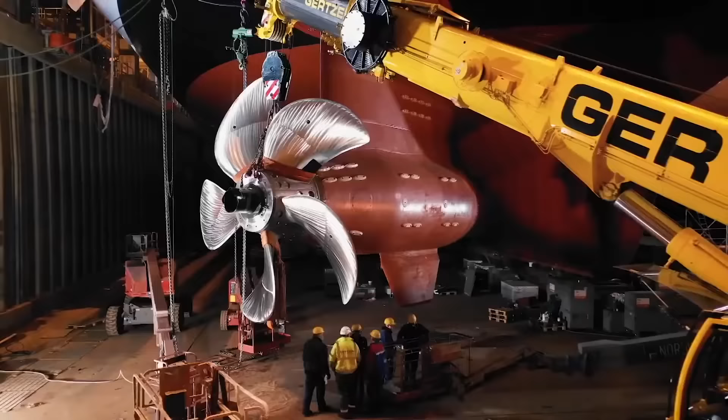By the way, the ship doesn't have 2 of these propellers, but 3. They're mounted on podded propulsion systems, so-called azipods. Those are made up of huge pods which are suspended from the bottom of the ship at the stern. They are capable of rotating 360 degrees, meaning azipods provide the giant vessel with easy and quick maneuverability.

I will show you in more detail how all this works in the second part of the episode, but for now, I will only say that these azipods were manufactured in Finland, and then sent by sea to the French town of Saint-Nazaire, the home of the shipyard where the vessel was built.

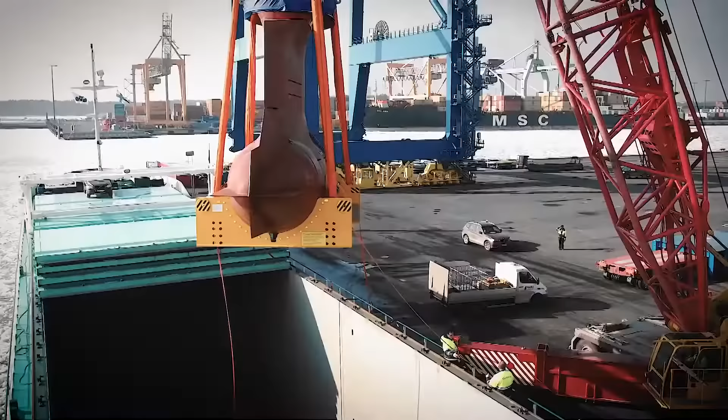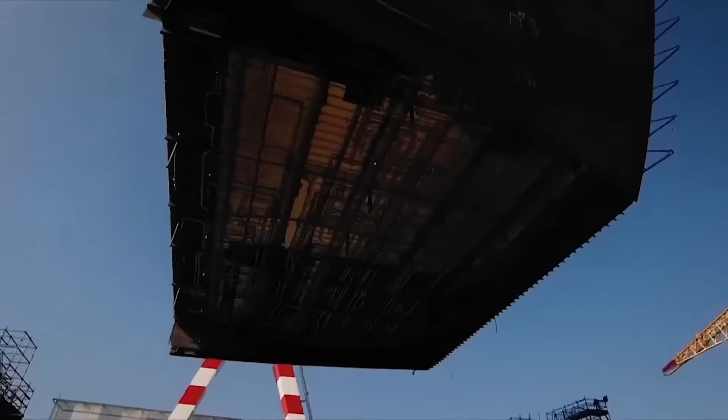In general, Symphony of the Seas is a huge construction set consisting of hundreds of thousands of parts which were manufactured in dozens of different countries located on different continents. So it began to unite people from distant corners of the world even before the first passengers of various nationalities ever stepped on board.

Boarding a ship is very much like boarding an airplane. Even these gangways, well, those who often fly know that they are almost identical to those in airports. Well, maybe these are a little wider. Only planes have a maximum of 2 such gangways, while the largest airliners might have 3. But here there are 5 of them.

And another interesting peculiarity: those who fly know that boarding of an aircraft starts about an hour before departure and stops 20 minutes beforehand. But since 6,000 people have to go through here onto the ship, boarding begins 6 hours before departure, so that everyone has time to make it on board. This is why cruise ships almost always depart in the evening. All day long, passengers come on board, get used to their cabins, and then closer to sunset, the gangway is finally pulled back, the doors are all closed, and the ship rolls away from the quay wall.

Thanks to those azipods that we mentioned earlier, and an additional tail rotor, Symphony of the Seas completes this difficult maneuver by itself without the help of any tugboats. Only a small Coast Guard patrol boat moves ahead of it, dispersing small pleasure boats and ferries out of the liner's path. This moment, already routine for the crew, is always quite exciting for the passengers, who at the moment of departure always pour out onto the upper decks. After all, the sea, and even more so these calm oceanic waters, aren't anything like railroad tracks, and these gigantic ships are actually seen off in a very different way from trains.

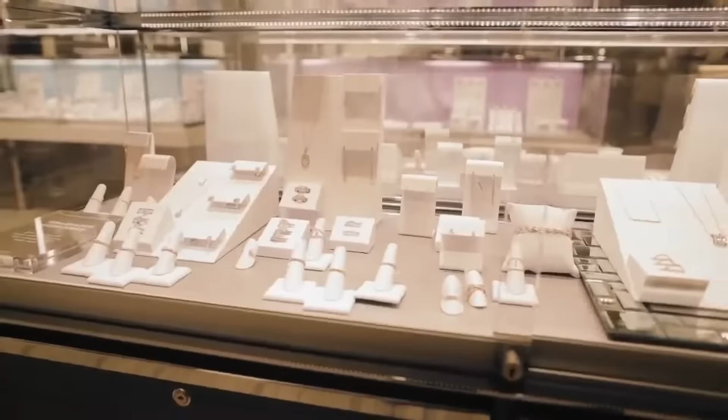However, the passengers will hardly have time to feel any separation woes on the ship. This giant floating city is designed to be fun and entertaining. The liner is 1,188 feet long, more than 3 soccer fields. Its width is 216 feet, and in this huge space there are 28 restaurants, 3 swimming pools, 10 jacuzzis, a theater equipped with the most complex Broadway machinery, an ice rink, a tropical park, a water park, a fitness center, a casino, and many shops and boutiques that constantly keep tourists in a state of shock and awe and continuous happiness. It is somewhat reminiscent of something out of a fairy tale, a place where you need only eat, sleep, and drink.

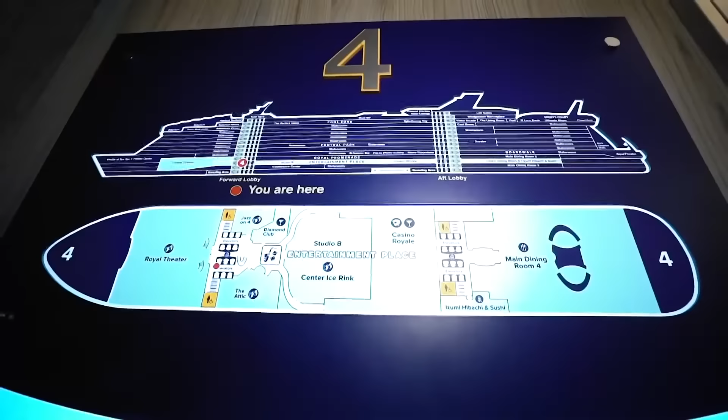When you look at the map of the ship, these are posted everywhere here, you get the feeling that the ship is some kind of toy. Yes, there's 12 passenger decks. Yes, it says 2,750 cabins, but what do all these numbers mean? You only start to get a sense of it right here in the elevator atrium. Just take a look. 6 high-speed elevators transport thousands of people to a height of 229 feet around the clock. And at the same time, all this is now moving at a speed of 30 miles per hour in the direction of Mexico. Incredible.

Even more incredible is the fact that the ship is directly controlled by only 3 people while it's in motion. And among them, there is no boatswain, no skipper, no helmsman. Even the captain himself isn't on the bridge all that often. Today, the people who control the ship from here, from the captain's cabin, are no longer what you might imagine, sailors with tough, salty, weathered faces. They look more like office workers, and this place resembles some kind of control room.

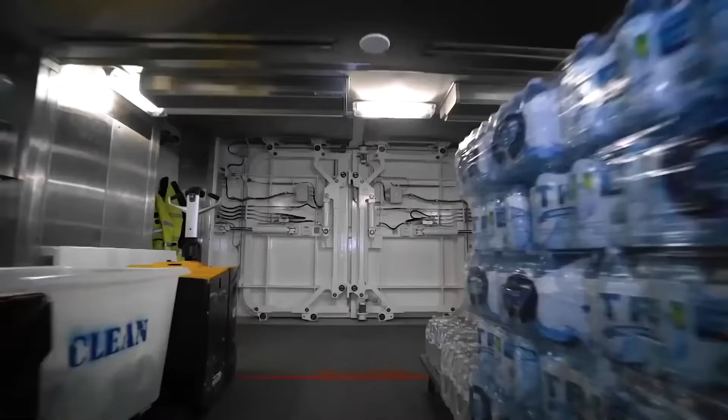They are very afraid of the possibility of food poisoning here. Since thousands of people live compactly on the ship, a simple case of E. coli can turn into a real epidemic in the span of just a few hours. And even putting that aside, not all countries can provide products of the high quality that Symphony chefs require.

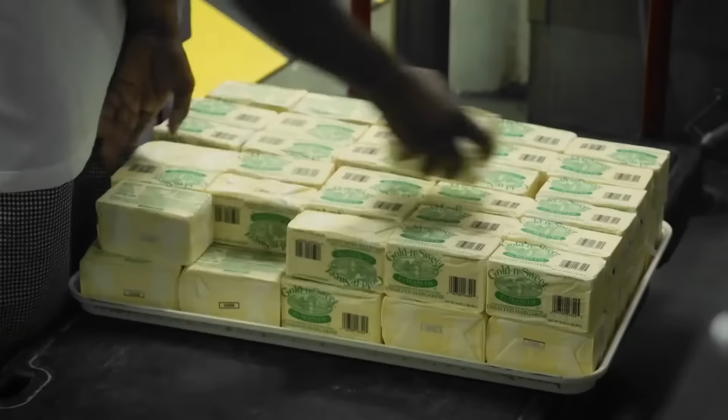Milk, meat, seafood, vegetables, frozen products, fish, all of that and more is stored in the dozens of other refrigerators. Anything and everything that might be needed to prepare the 350 different dishes that can be found on the ship's restaurant menus. Of all the foodstuffs stored on the ship, only 2 products are honored with having their own private refrigerators. Well, simply because they are the most consumed items. First, we've got bananas. Here are plenty of boxes with yellow ones, and there are also boxes with green ones. They will finish ripening during the cruise.

And the second product is the most popular. What do you think it is? I'll show you now. Eggs. 120,000 eggs are eaten on board every week. Moreover, bananas and eggs are, as economists and logisticians say, goods of inelastic demand. Their consumption rate, and hence the required amount, is easy to predict. Things are more interesting when it comes to the rest of the products on board.

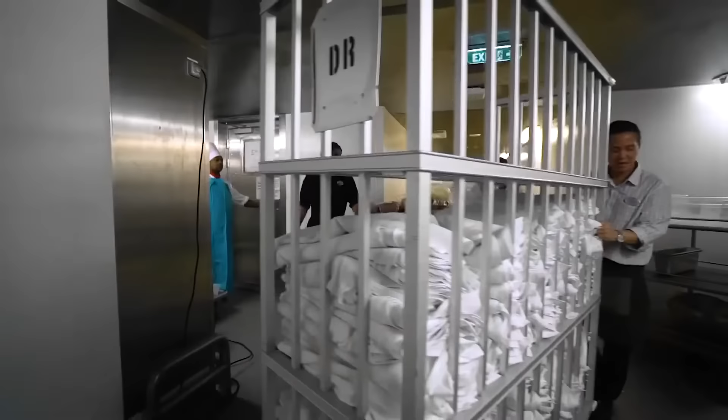A specially developed computer program analyzes the number of passengers and their nationalities even before setting sail, and depending on that information, it gives recommendations on how many of this or that product you need to take with you on any given voyage. For example, if there is a large number of Latin Americans on board, more meat and spicy foods will be added to the menu. If there are more Asians, they'll reduce the amount of dairy products, and if Indians are prevalent, they will increase the number of curry dishes, but at the same time they will bring less beef.

One of the main delicacies of any haute cuisine is of course the Atlantic lobster. Here he is, such a handsome guy. This dish, by the way, is not cheap. Therefore, it is very rare. And even here it's cooked, well, not all that often. It's a one-of-a-kind item, one might say. Made 6,000 times every day.

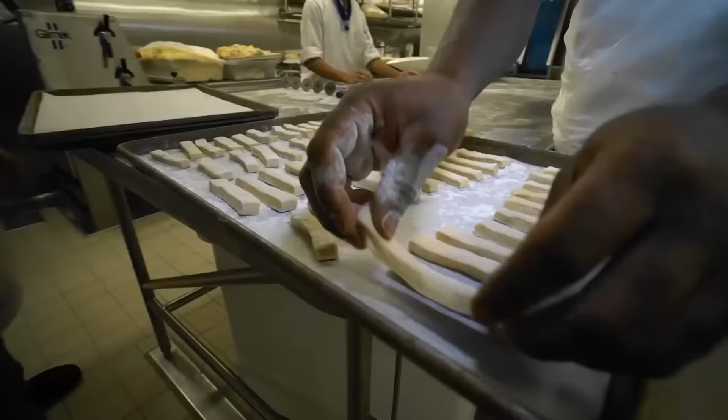Each of these workers, there are mostly Filipinos working here, shells about 500 lobsters a day. Those of you who have ever shelled, for example, crayfish, can imagine how much work this entails. On just 3 decks, more than 1,000 people are employed in this huge floating kitchen, 250 of whom are professional restaurant chefs. They fry, boil, flambe, sauté, and whip around the clock and in shifts.

Take breakfast rolls, for example. 12,000 of them are baked here every day. In fact, the responsibility of the cooks here is enormous. The clients on the ship are very demanding, the products are expensive, and the cooking portions are gargantuan. Therefore, the slightest mistake in the proportions of ingredients can cost tens of thousands of dollars.

Well, for example, tomato soup, 160 liters of it. If it's a little bit overcooked or undersalted, that's it. Eat it yourself since no one else will. Seating and serving several thousand people in the liner's restaurants at the same time is a separate logistical task, and they strive to make it so that customers don't have to wait more than 15 minutes for an order.

Several hundred waiters of 50 nationalities cope with this task, each of whom must speak at least 3 languages. And bartenders should know at least 5. Well, technically there was an exception made to that rule. In general, everything on this ship suggests that this is a high-tech structure created according to the latest leaps of science. For example, in this bar, drinks are mixed, well, probably in the most progressive way on the planet.

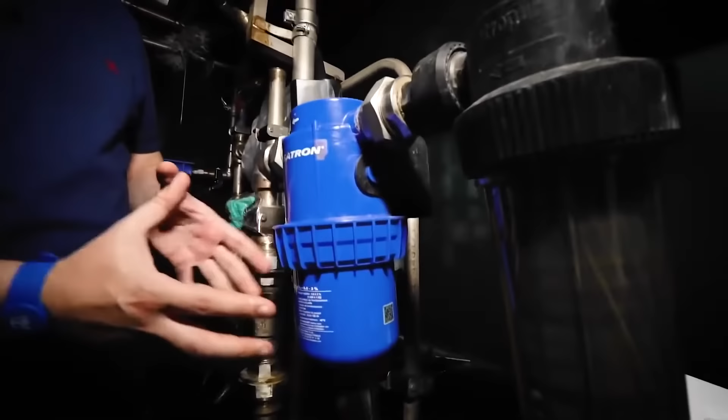Here's the main secret. Here in this blue barrel, fertilizer is kept. Water passes through it, carries away some of the fertilizer, and carries it to the plants. So thanks, in fact, to this seemingly unremarkable little device, this whole huge blooming park exists.

Another secret of the permanently green park is its honeycomb structure. There is no solid ground here. All the plants, from the trees to the grass, are inserted into special cells in separate segments, small plastic boxes. It turns out to be something like a huge puzzle. If one of the segments suddenly starts to get sick or dry out, it's simply changed out for a new one upon arrival at the home port.

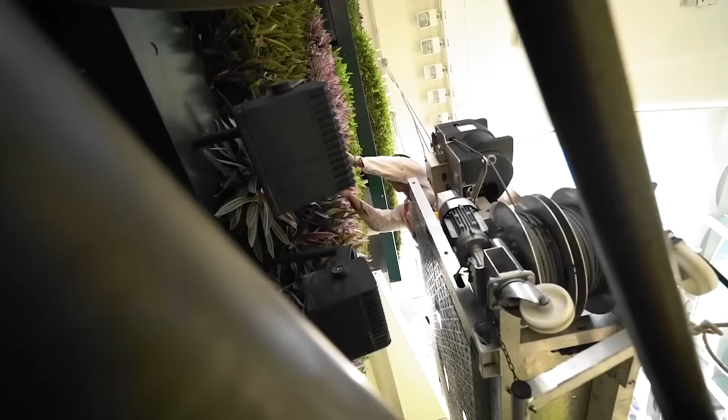This wall of vertical landscaping in the ship's central park follows the same principle. The gardener, who turns out to be a bit of an industrial climber as well, simply climbs in the bucket and changes out the parts of the wall that he doesn't like and discards the old segments. There is no time for sentimentality. Nothing should prevent people from enjoying their time here and being filled with joy. Remember what I said at the beginning, that this episode was about a cruise ship without romance and without leaving anything out?

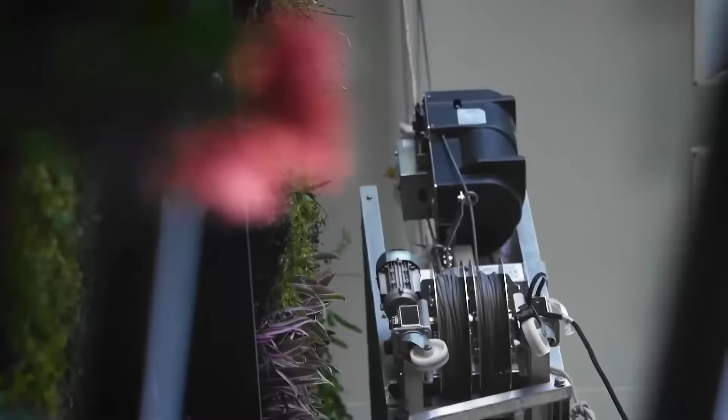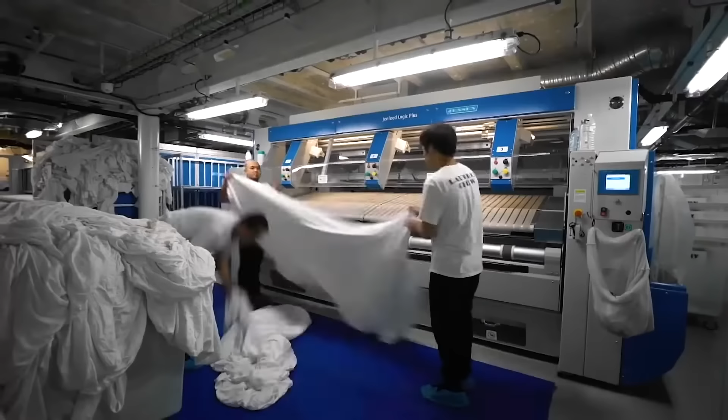In the next episode of Monster Machines, why doesn't the ice on the only floating ice rink in the Caribbean melt? Well, you know, it tastes like the most simple, ordinary Russian snow. How can 1,500 sheets be washed and ironed in one day? I want one of these for my house. Only thing is, I'm afraid it won't fit in my laundry room.

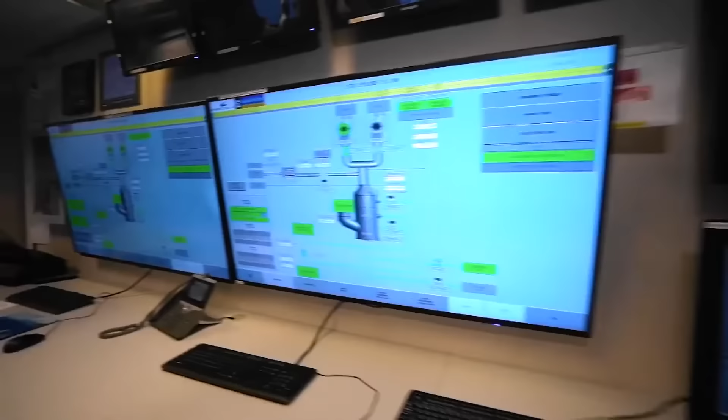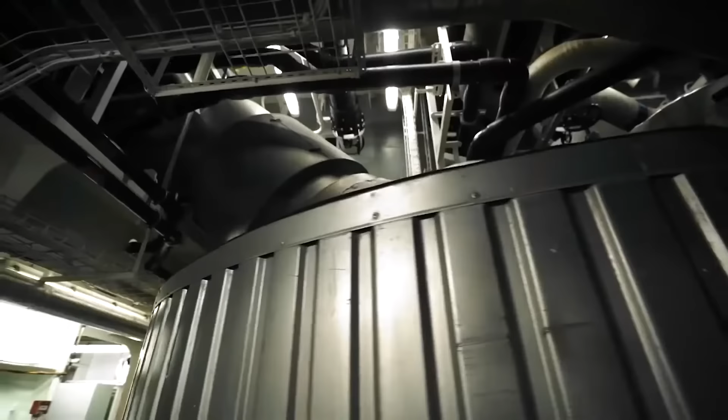Does Symphony of the Seas have enough lifeboats in the event of a disaster? How are the engines of this liner, which consume 3 tons of fuel per hour, arranged, and how do they work? 5th grade physics at work on the largest ship in the world. What is a 19th century telephone doing on a super modern ship? Hello? Bridge? And how can 30,000 plates get washed in 2 hours? Mr. Clean would be impressed. See all this and much more from the anatomy of the world's largest cruise ship in the next episode.

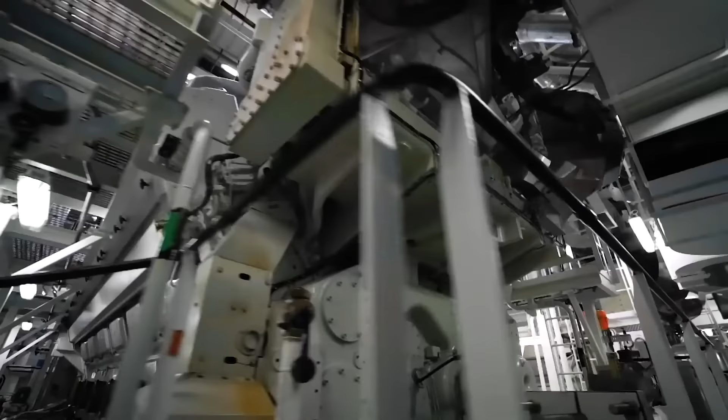In the first part of our look at the anatomy of the largest passenger liner in the world, we told you about and showed you why Miami is the home of this monster. Essentially, it turns out that the ship wasn't built to fit the size of the port, but the port was built to fit the size of the ship. Who are the people who run this giant, and why is there no helmsman on the ship? This is the captain's chair. There's no steering wheel. What room on the ship is the most secure and guarded? Here it is, the holiest of holy of Symphony of the Seas storage areas.

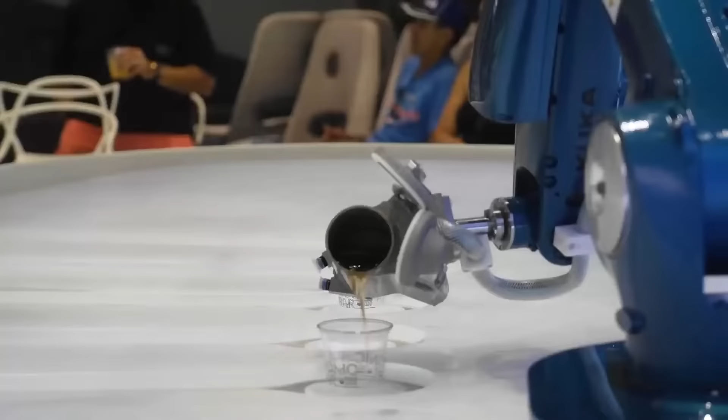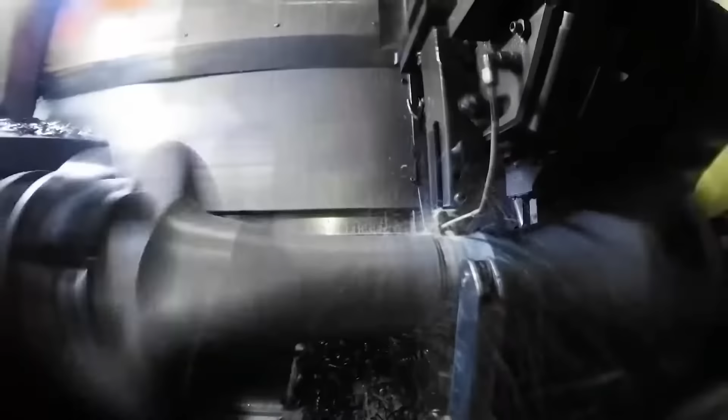And how many cocktail recipes does the least talkative bartender on the largest ship in the world know? You're not much of a conversationalist. All this was in the previous episode, and now we have even more about what's hidden inside this monster, a cruise ship without romance, but with science.

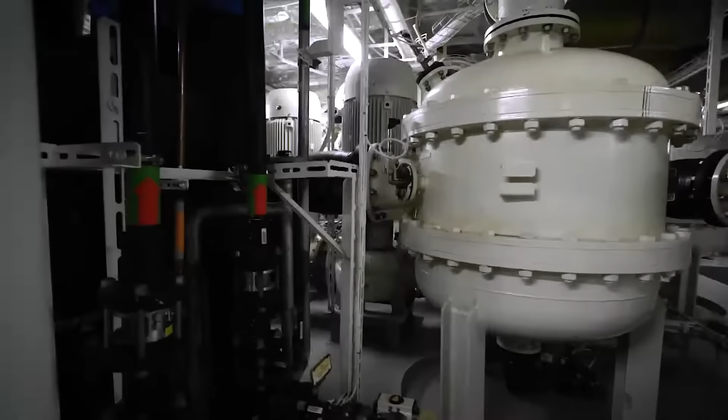And what could be less romantic on a ship than the machinery room? In the lower part of the ship, where tourists aren't allowed, day and night there's the roar of machines working in the semi-darkness, and these are what makes this entire giant city on water move. Symphony of the Seas is 6 diesel engines, a total power capacity of more than 100,000 horsepower. For a point of reference, that's approximately the power capacity of 1,200 cars.

However, not even close to all of this energy is spent directly on moving the vessel. The ship consumes colossal amounts of electricity. For example, for lighting, there are about 140,000 light bulbs on the liner. Also, electricity is spent on the operation of air conditioning systems and on the production of large quantities of water vapor. Yes, despite the fact that steamers and steam engines are a thing of the past, modern liners still use steam. A lot of steam.

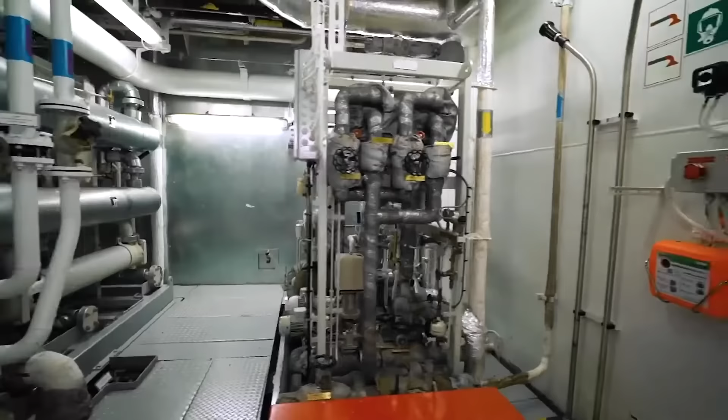No, it of course no longer rotates the turbines as it did, for example, on the Titanic, but steam is needed for more domestic purposes. It's a simple method for heating the water in showers and bathrooms, and it also heats different spaces when necessary. However, those aren't its main function. Steam is necessary for the heating systems for the huge fuel and oil tanks, and it's also used in fuel-oil separators. It's consumed by the turbo drives of some pumps, and, well, it's still necessary for several other important machines on ships, even in the 21st century.

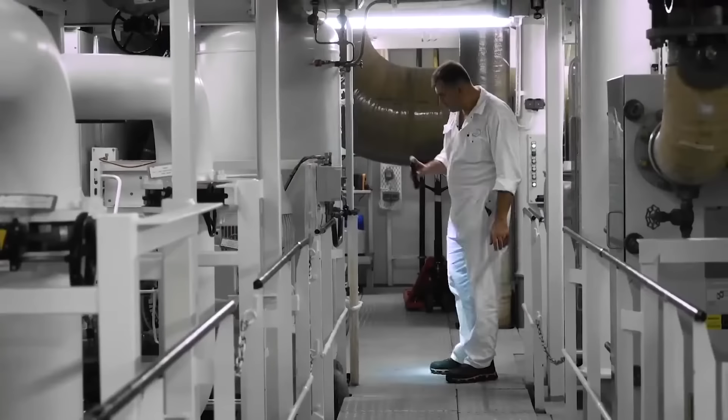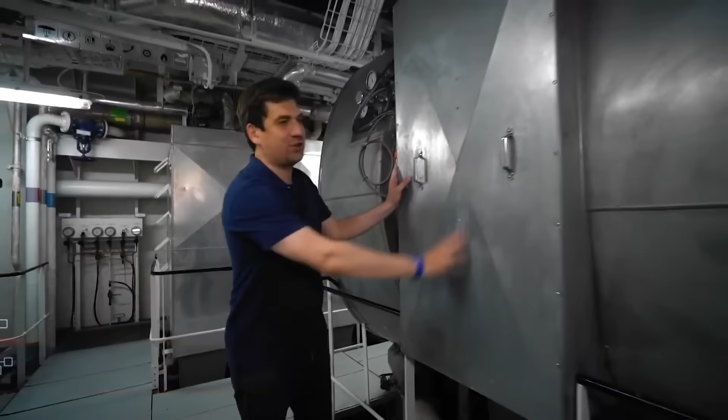Moreover, it must be perfectly clean so that impurities don't build up on the walls of the steam lines. Therefore, it is created from distilled water. But where do they get such large amounts of distilled water? It's produced right here on the ship using giant distillers. Here they are. There are 3 of them. The principle of operation is very simple. Well, it's basically a big tea kettle.

This is where water from outside comes in. Here it's boiled, steam accumulates in the upper part of this chamber, and the sea salt settles down at the bottom. So after a while, overheated steam, there's a lot of it, enters this chamber. Here it condenses, and as a result, the finished distilled water is drained through the pipe. And the leftover salt? No, it's not used in the kitchen. They just throw it back into the sea. Several tons every day.

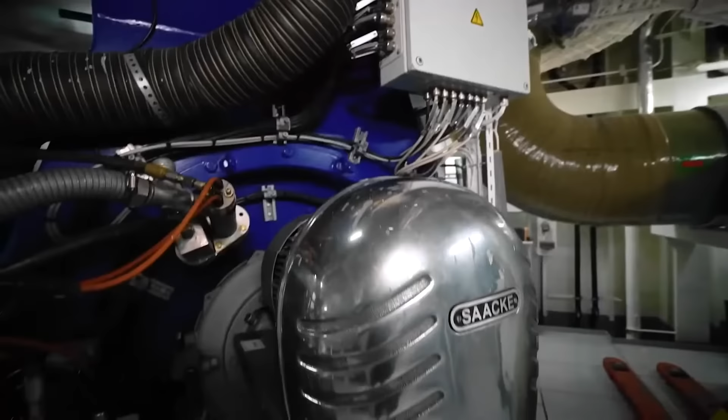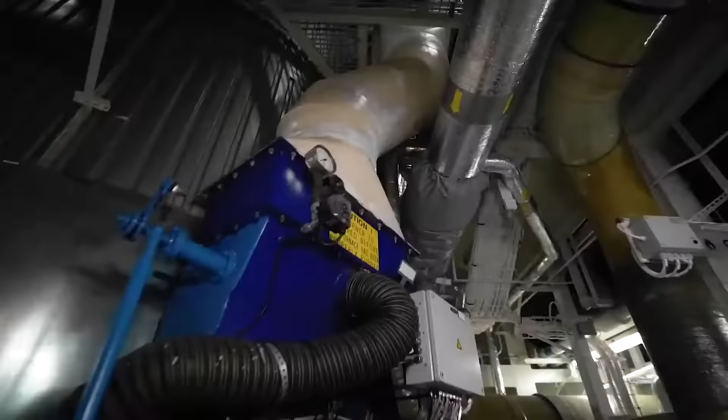In the end, the resulting steam is used for its intended purposes. Moreover, part of it, when it condenses again, is sent back to the boiler. This is the so-called reverse cycle, but most of it is irretrievably lost, and therefore the reserves of distilled water have to be replenished all the time. It's also needed to freeze an actual skating rink on the ship. Here you can skate during the day and watch an amazing ice show in the evening. That includes a number of Russian figure skaters.

And by the way, the ice here is of a very high, one might say, Olympic quality. The ice on the rink measures in at about 3.5 inches thick. Well, surely many of you have seen an ice resurfacing machine on TV, or maybe even in person. They've got the exact same kind here, though maybe it's a little smaller than typical ones.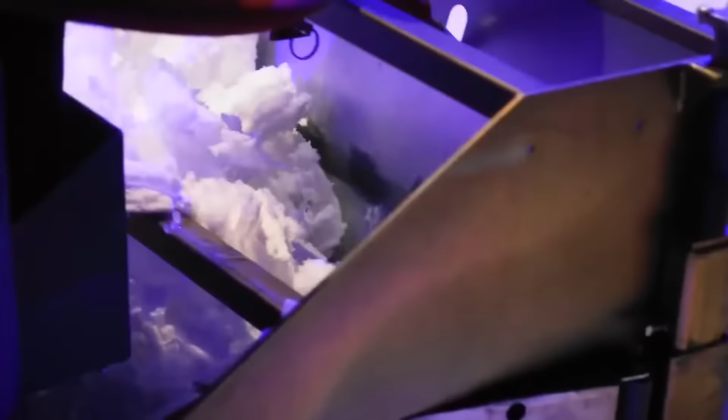By the way, since this ice is frozen from desalinated seawater, it doesn't freeze quite as well. And according to the skaters, this ice is softer than that on which they are used to performing on land. To be honest, it's hard for me to imagine how ice could be soft, but what is absolutely certain is it's incredibly clean, distilled. I even gave it a taste, but it was really nothing miraculous, just your typical snow.

The total weight of the ice in the arena is several tons, and a refrigeration unit is needed to freeze it. Again, it's about the same as the one used on professional skating rinks and professional arenas. Well, this one might be a little smaller. It's located, as you would expect, in the area under the stands.

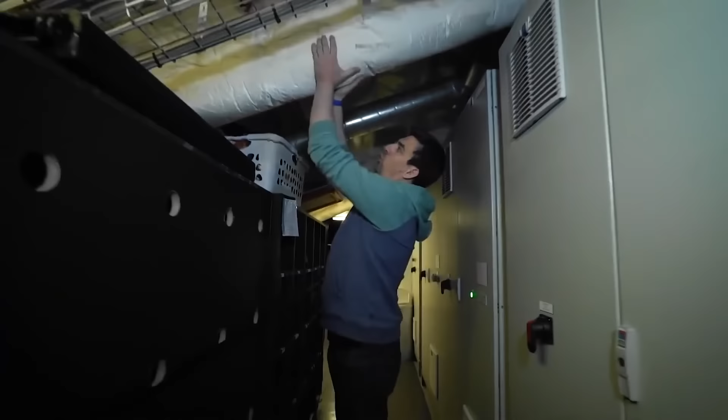The principle of its operation is very simple. Through special pipes, here they are, wrapped in thermal insulation, water and refrigerant with a temperature of 14 degrees Fahrenheit are pumped to the arena. This freezes the ice layer by layer. It takes about 5 days to prepare the entire ice rink.

The owners and designers of Symphony of the Seas claim that this ship is not only the largest in the world, but also the safest. There are so many different safeguards in place in its control system that it is argued it's almost impossible to lead the liner into disaster, even if you were to deliberately try to do so.

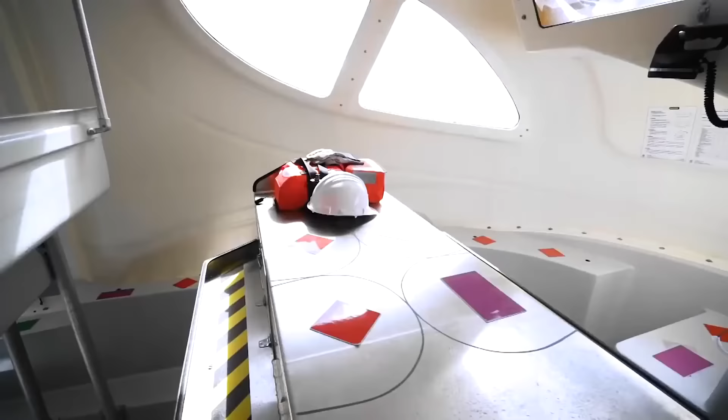Still, in the event of an extreme case, there are means of evacuating the ship on board. They have to accommodate the evacuation of all passengers and crew if something were to happen. These lifeboats, to match the ship, are the largest in the world. Each has a capacity of 370 people. There are 18 of them on the ship.

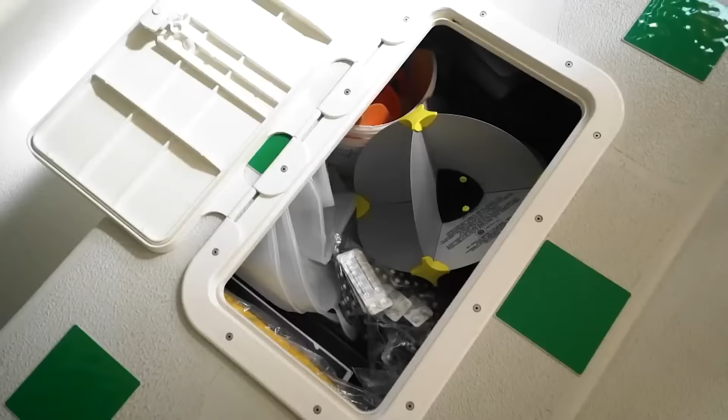Moreover, they are kept fully prepared at all times. Their fuel tanks are filled, they have a cruising range of about 155 miles. There is a special supply of dry rations and water on board in special sealed boxes. In the event of a disaster, there would be no time to bring it all from the ship. In general, everything is thought out to the smallest detail. This unsinkable and waterproof plastic jar, for example, contains signal flares.

In addition to the huge boats, there are also many rafts that inflate themselves in the water and several of these high-speed rescue boats. They are used to coordinate action and quickly help people who find themselves in the water. The crew must participate in evacuation exercises at least once a month. This vessel has never seen a real red alert, but thanks to constant training, 2,000 crew members are ready for any turn of events, 24 hours a day, 7 days a week.

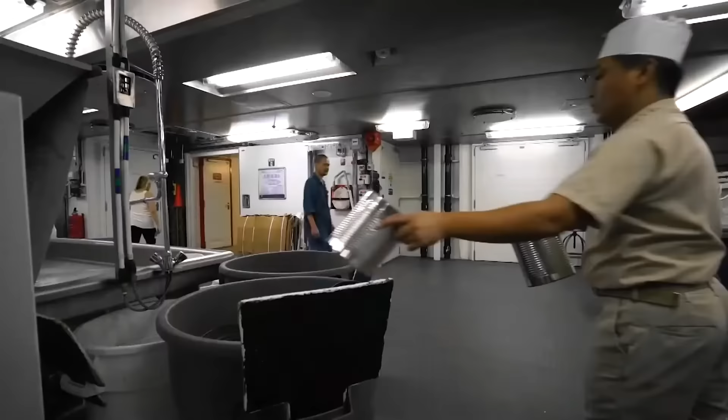The ship also has its own waste recycling plant. Here it is. This, for example, is a machine for pressing cardboard packaging. Here, cans are collected. Then they are all crushed into these large bricks. Cellophane is processed here. At first glance, it is a little paradoxical how they deal with glass bottles.

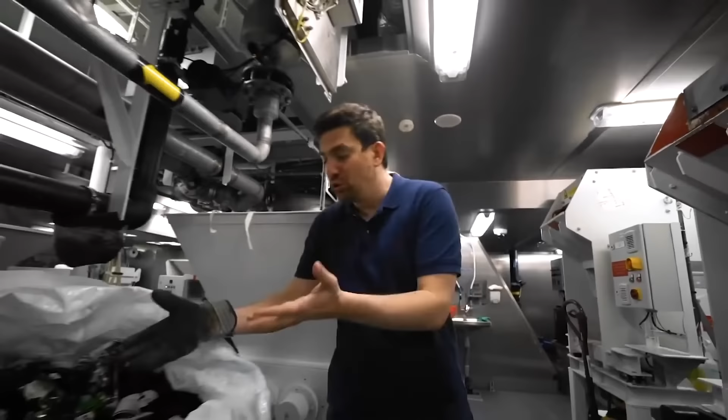I'll show you now. They are simply broken into little pieces so that they take up less space, and they are sorted as follows. Here we have a big bag with dark glass. Here we have broken transparent bottles, and here we have green glass. And here's what's surprising. As everywhere else on the ship, in this waste recycling shop, everything is kept perfectly organized. There isn't even an unpleasant smell here.

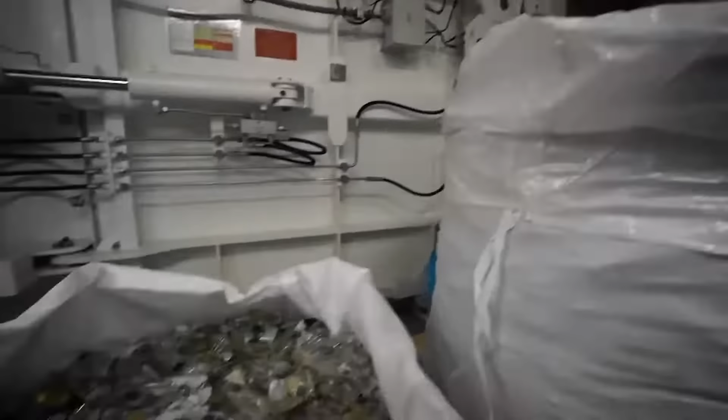The creators of this ship seem to have a thing about cleanliness and environmental friendliness. In a good way, of course. For example, the liner's engines burn several tons of diesel fuel every hour. But at the same time, not black, not even blue, but exclusively white smoke comes out from the Symphony's exhaust pipes, all thanks to scrubber cleaning.

Well, to simplify it as much as possible, the exhaust gases are washed with seawater. This dirty water is then maintained and stored in special tanks until the ship arrives at a port, and only carbon dioxide with a minimum amount of soot and impurities is released into the atmosphere.

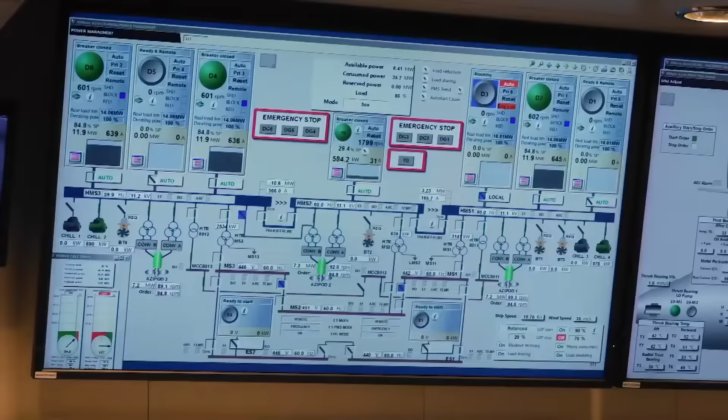Scrubbers and engines are managed from this control room. It's located in the very center of the ship, almost at the waterline itself. Therefore, there are no huge windows to be found here, like on the captain's bridge, but there are 51 monitors which display thousands of different parameters. The largest touchscreen control panel even had to be hidden in the ceiling. Here it's already pretty cramped without it.

There's a special emergency phone in this control room. Well, there's a telephone for singular emergencies. Its peculiarity is that it will work in any case, even if, say, God forbid, of course, all systems here completely fail and all power is lost. By what means? I'll show you now.

Good old inductive coil. This technology, well, I don't know, it's probably around 120 years old, and it's very strange to see it on this ultra-modern ship. But technology such as this is sometimes the most reliable. Hello? Bridge? Apart from that, the equipment in this control room is of a quality comparable to NASA's Flight Control Center, and the whole vessel is practically a spaceship.

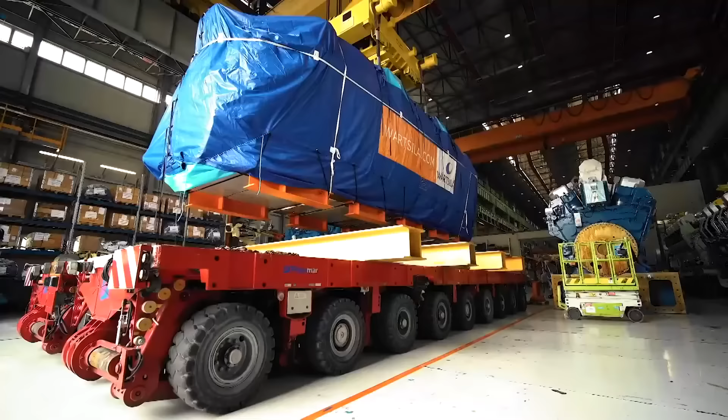Sure, they're not jet, but diesel-fueled V-engines, but each weighs about 200 tons. 2 of them are 16-cylinder, 4 more are a bit smaller with only 12 cylinders. These giants were made in Italy, and then they were sent by a special convoy, first along blocked-off roads, and then delivered by sea to a shipyard in the French town of Saint-Nazaire.

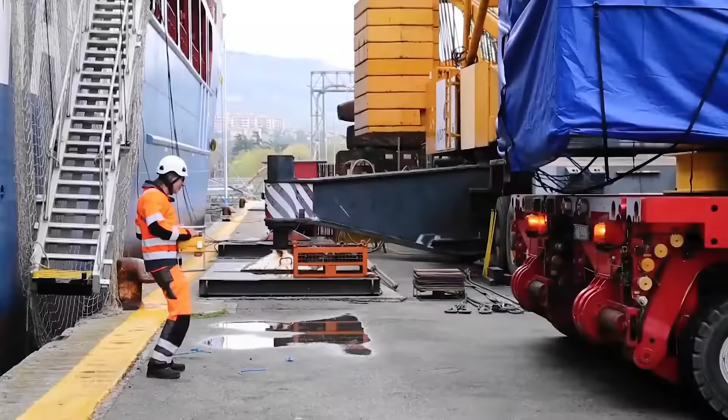Building each of the 6 fiery hearts of this monster was such a difficult technological task that we decided to show it to you in more detail. That's why we're taking the reverse path to the engine, from the Caribbean Sea into Miami through France to the Italian industrial port of Trieste.

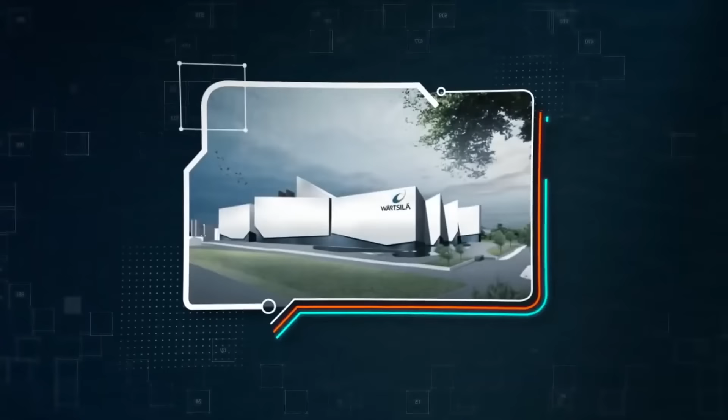The company that makes the world's largest marine engines in Italy is actually from Finland. It's called Wärtsilä. It got its name in honor of a small Finnish village where this business once originated. It's curious, but today the urban-type settlement and the Wärtsilä station of the October Railway are part of the Sortavala region of the Republic of Karelia, a typical Russian single-industry town with a modest budget. At the same time, Wärtsilä has an annual revenue of several billion dollars.

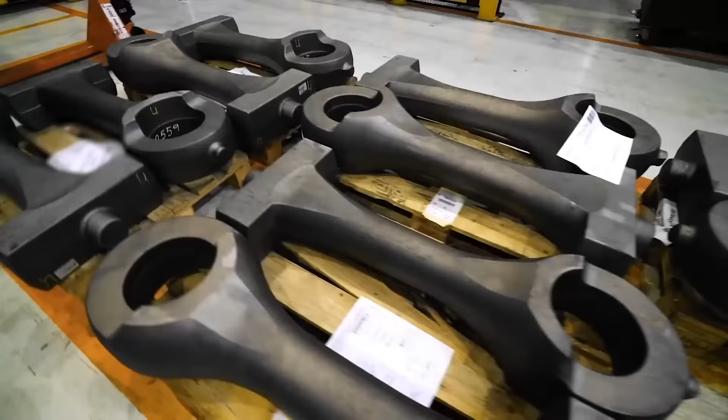But back to the engines. Each of them consists of several thousand parts. Some of them are made right here in Trieste. Some come from subcontractors. Cast and forged blanks, for example, are sent from a metallurgical plant in the Czech Republic. The so-called connecting rods come here to the plant in this form, crudely forged, very coarse to the touch. Here, they are then installed in these machines. They each weigh 330 pounds, by the way.

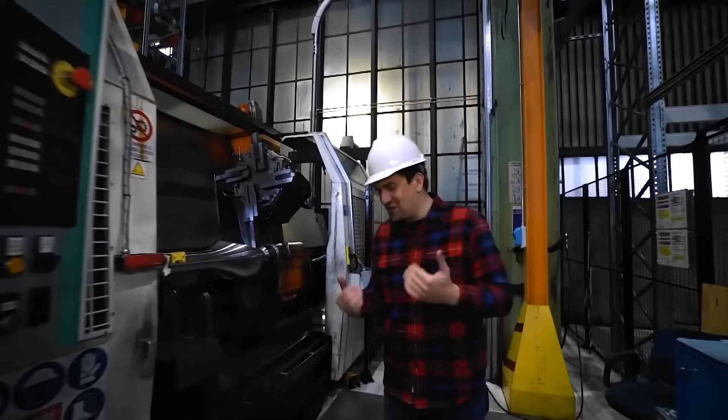Many of us, when we were kids, not everyone of course, in shop class did something similar, carving out various objects. It's about the same here, only the size is much larger, and the accuracy is very high. As a result, the connecting rod is worked to, well, just to a mirror shine.

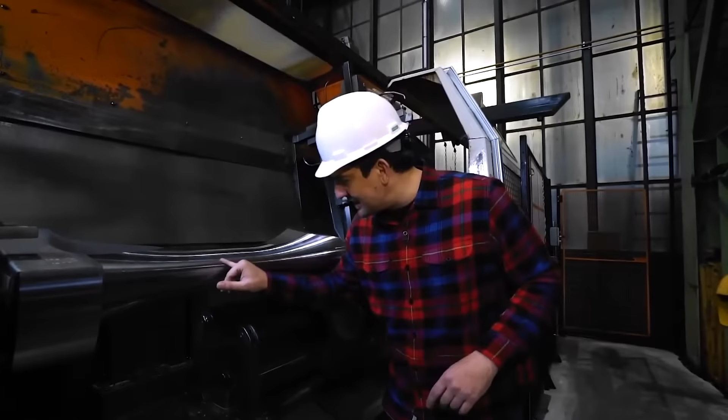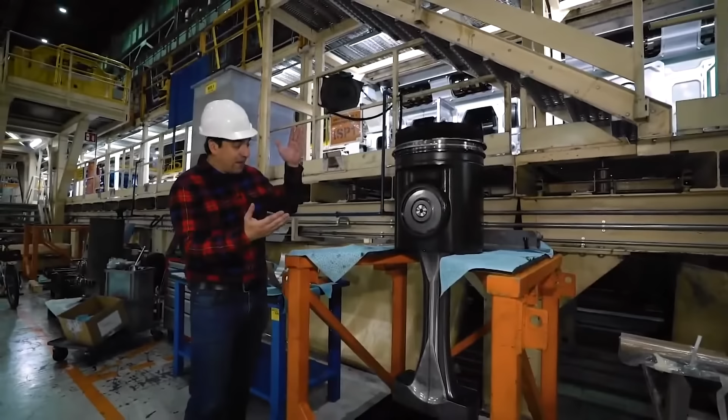Everyone who has ever gone over the engine of their car, seen the pistons, immediately recognized them. Well, this one, believe me, is exactly the same. Well, a little bigger. This weighs about half a ton. And the volume of the cylinder in which it works is 6.5 liters. That, by the way, is a bit more than the total volume of my car's engine.

By the way, using the crankshaft as an example, you can easily understand the principle of operation of a piston engine. Look, in this position, for example, the piston would be in the upper position, and this crank pin is also up. At the same moment, the other piston is in the lower position, and the crank pin, respectively, is at the bottom. Thus, the pistons move up and down, and the shaft rotates.

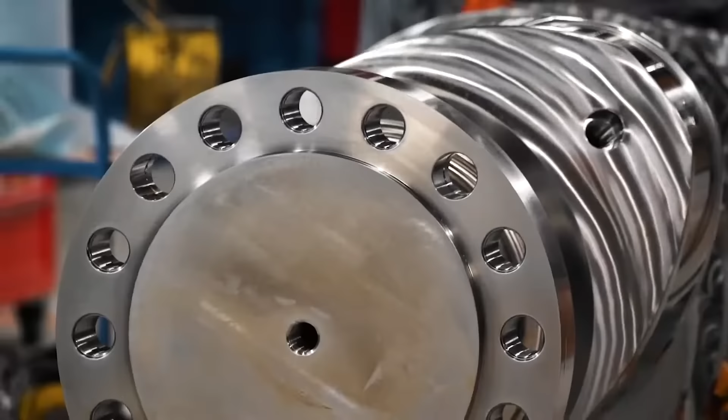Everything is very simple, but the most amazing thing is that this particular shaft weighs 25 tons, its length is 26 feet, and it's made of one single solid piece of metal. Just unbelievable. By the way, there are only a few metal lathes in the world that can carve a 26-foot item like this from a multi-ton bar of high-strength alloy steel.

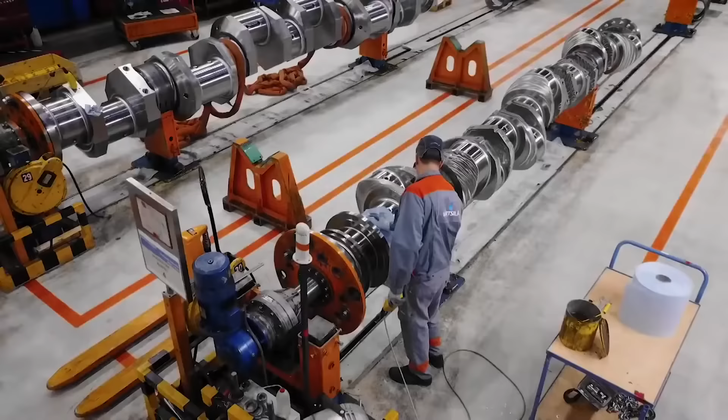The turner's worst nightmare here is to screw up even one detail. The crankshaft is worked on for several weeks, and it costs more than $1 million. Ultimately, after numerous checks and tests, the crankshaft and thousands of other parts are sent to the assembly area.

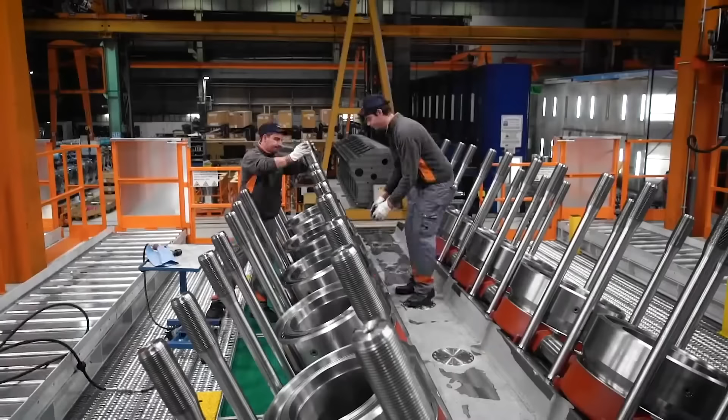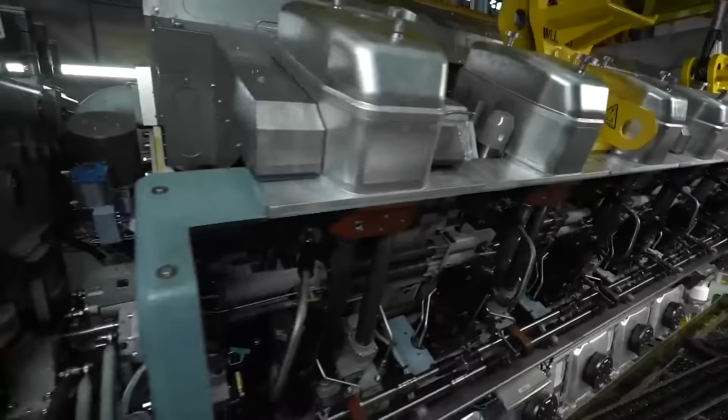In a few more weeks, the engine is finally ready, and now tests await it. If everything is in order, the engine is rolled back into the shop, all technical fluids are drained, and it's checked again and again.

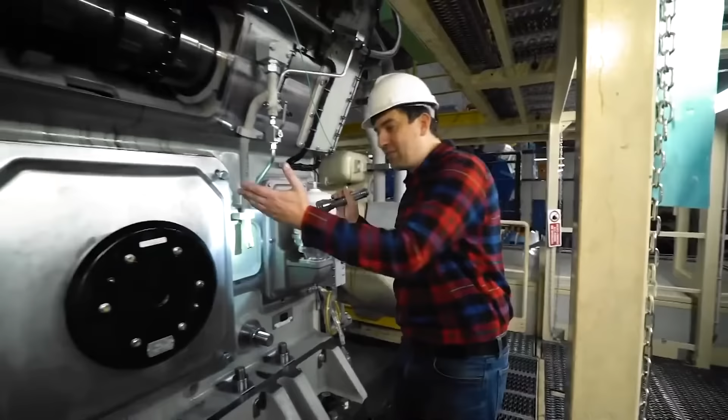In the testing chamber, the engine has already been checked out by numerous automated computer systems, sensors, and so on and so forth. But no one has done away with the good old visual control test. Everything here, again, is like in a car. We open the hood and look inside. Perhaps the most important difference between this engine and a car engine is that there are 12 of these hoods, or rather viewing windows.

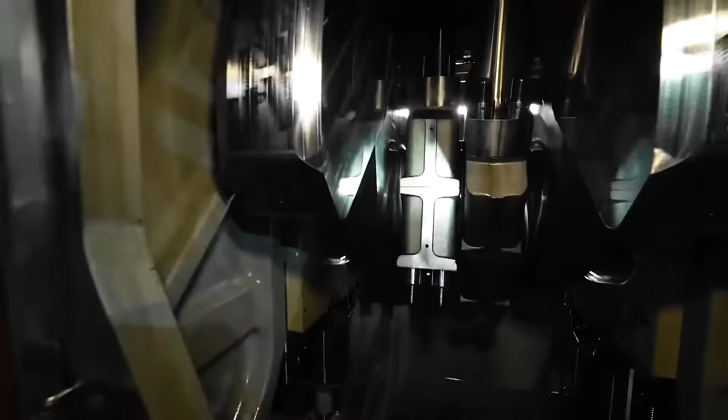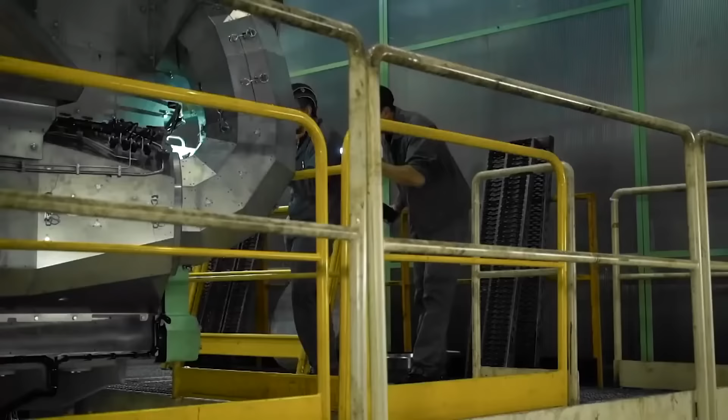Behind each of these windows is one of the cylinders and pistons connected by a connecting rod to the crankshaft. If you wait for the oil to drip down from the parts, you can simply see with your eyes if any jams or other metal defects have formed during the tests. When at this stage the inspectors give the go-ahead, the only thing left is to pack up the engine and send it to the customer. But that's easier said than done.

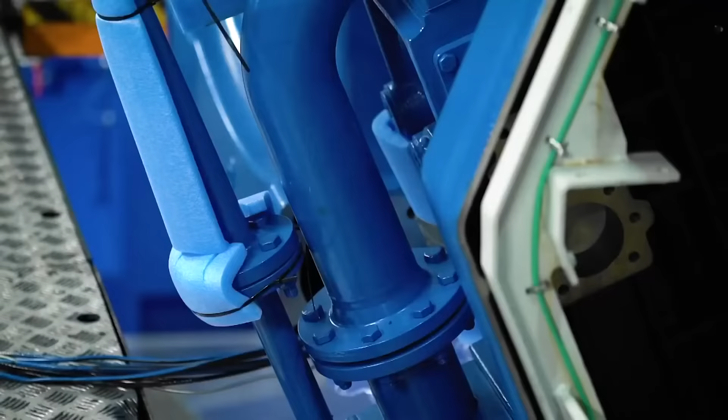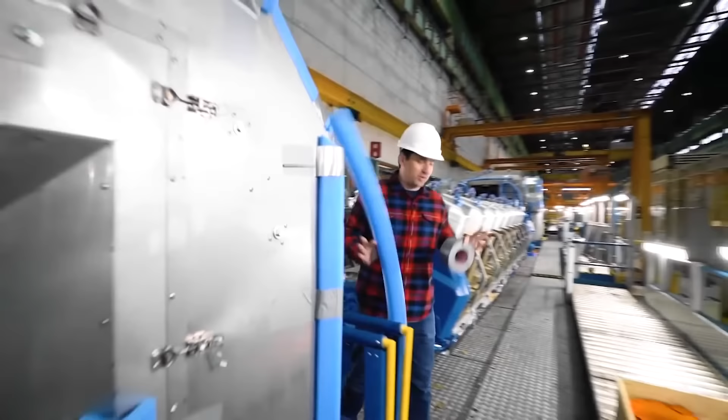Anyone who has ever transported, say, a dresser knows that the most necessary things to get that done are duct tape, some styrofoam. Oh, here we have some. Well, and a lot of bubble wrap. When moving a finished engine, everything is about the same. All protruding parts are carefully wrapped with these foam corners, sealed with tape, cling wrap, and so on and so forth. Well, in general, everything is the same as when moving furniture. There is a slight difference, though. The weight of this dresser is 180 tons.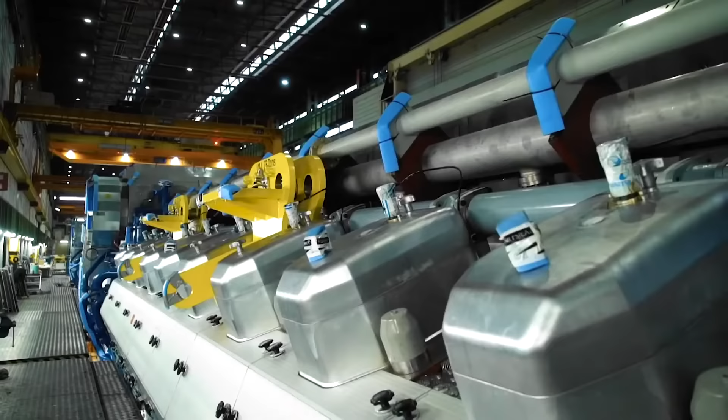It takes a week just to get it ready for transportation. By the way, at the same time, road services and a special platform, the only one in Europe that can support such a weight and size, are being prepared for the giant's move to the port.

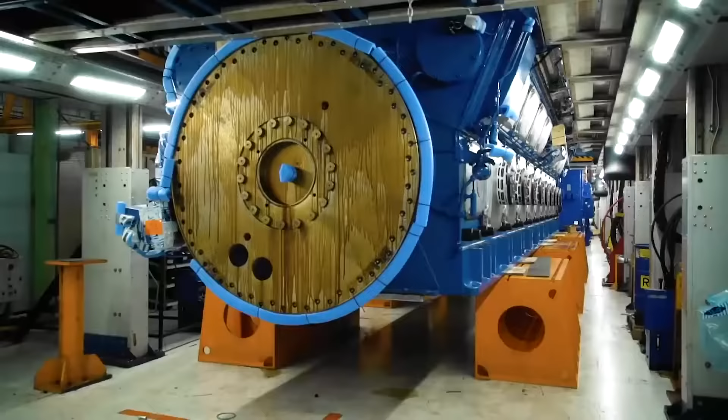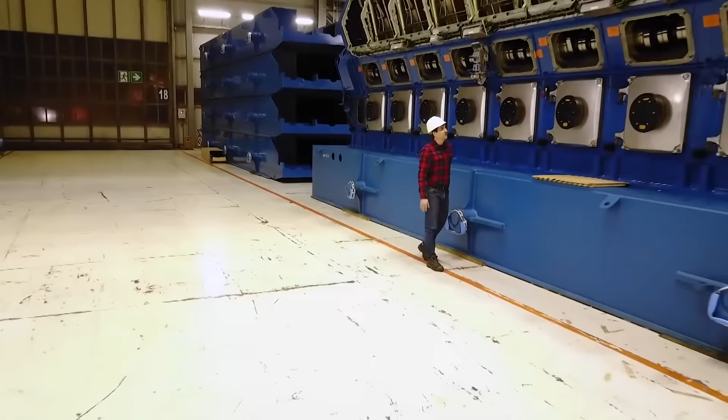Only here, at the very end, in the finished goods warehouse, can you begin to understand the true scale of this giant engine. Its height is about that of a 3-story building. It weighs several hundred tons and generates the amount of electricity that would be needed for a small Moscow neighborhood. The actual biggest mechanical heart of the world's biggest cruise ship.

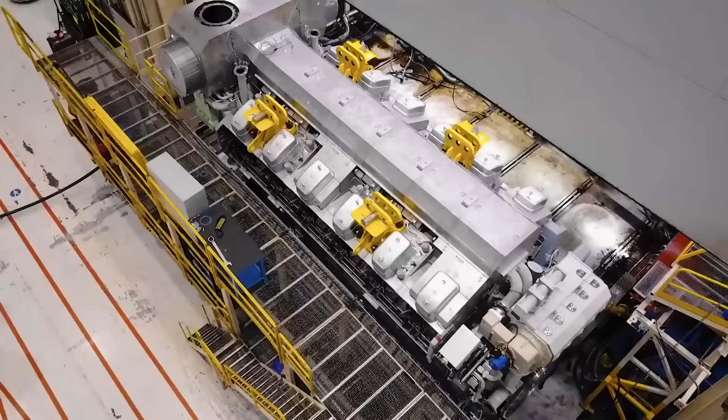However, there is one caveat. For some reason, the fuel from these countries often contains water. By accident, of course, I'm sure, but this is unacceptable for the engine. Therefore, all fuel is cleaned directly on the ship before being fed into the combustion chamber. But how can several tons of fuel be cleaned per hour, and when moving at full speed too?

And here, centrifugal force comes to our aid. Fuel enters these separators, which are in essence huge mixers, and it's spun at a breakneck speed. What happens in there? Water, which is heavier, is forced out to the walls, and the oil product, as the lighter portion, accumulates in the center and then enters the engine. 5th grade physics at work on the largest ship in the world.

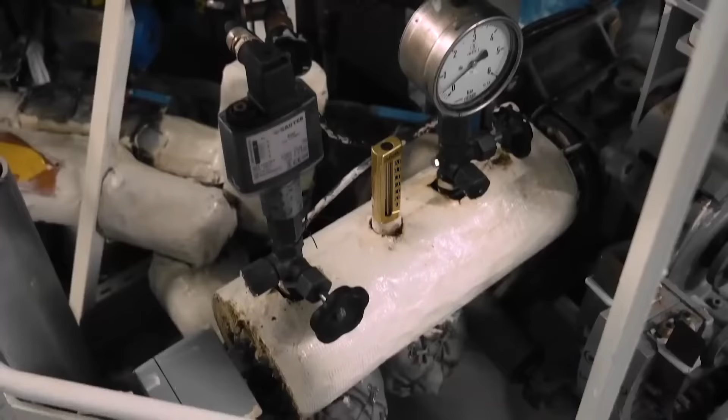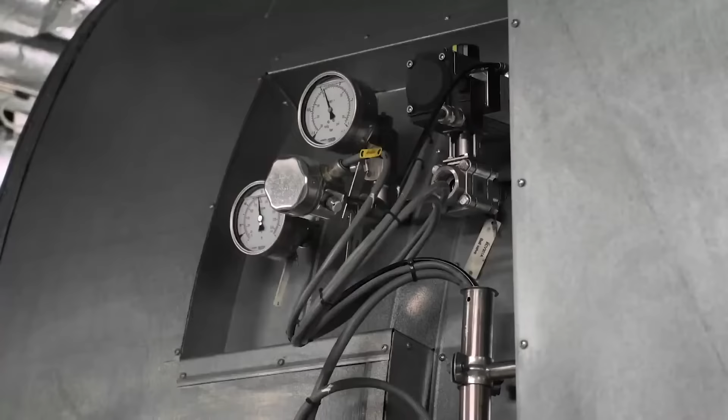At the same time, the fuel in the separators is also heated. That makes it more runny and it therefore burns better. By the way, the liner has an electric drive. No, its powerful internal combustion engines do not directly rotate the ship's propellers. They spin generators that generate electricity. And then, along the high voltage lines hidden in the bowels of the liner, the current travels to the electric motors, which spin the propellers.

This diesel-electric circuit makes the vessel more maneuverable. After all, an electric motor, unlike a piston one, can stop and change the direction of rotation almost instantaneously, and it doesn't need a gearbox. The motors, together with the propellers, can also rotate 360 degrees around their axis. Therefore, it becomes very easy to operate the liner.

However, even the most high-tech devices and numerous automatic safety systems are not able to 100% protect the ship from basic human error. 3 weeks after we filmed this episode, in the same Mexican port where Symphony of the Seas stopped for an afternoon, 2 cruise ships managed to collide. Oh my God! There were no casualties, both ships even continued on their voyages, but still, this situation once again reminded me that regular emergency evacuation drills on the ship are not at all excessively precautionary.

However, maybe no less dangerous than a collision with another ship would be a situation in which 6,000 passengers were left hungry. They almost seem to fear this even more here. The 350 exquisite dishes on the menus of 28 restaurants will satisfy even the most demanding customer. We already showed you how this monster's kitchen works in the first part of this episode, and perhaps at this point the question occurred to you: how can you quickly wash a large number of plates, mugs, glasses, and cutlery after dinner?

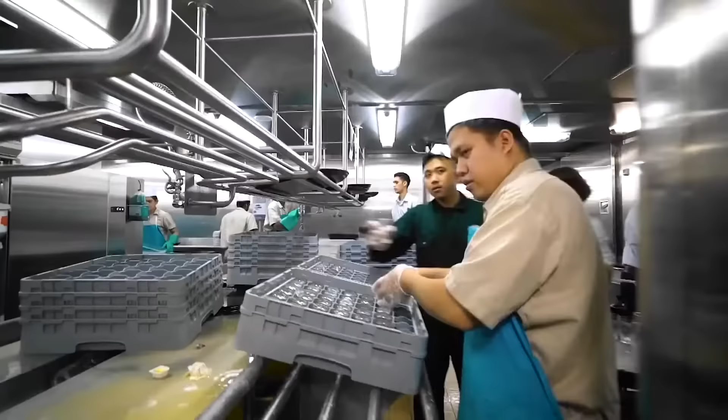On this ship, in general, all technological processes that can be are built on the principle of a conveyor belt. Well, this is logical, of course, because this is one of the most effective forms of labor organization. And here in the kitchen, the dishwasher is also one huge conveyor machine. Come with me, I'll show you. Sorry, dirty dishes are being loaded from that side and clean ones are already coming out here. The whole process takes less than 1 minute, extremely fast. Mr. Clean would be impressed.

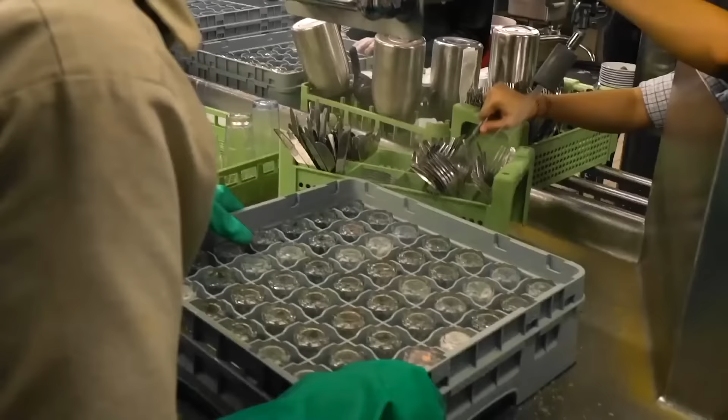There is no other choice, because after every dinner, about 50,000 dishes have to be washed, and that's not counting the kitchen utensils. Though it may seem like less than a critical machine, the dishwasher on the ship is actually such an important unit that it has a twin backup in case the main one breaks.

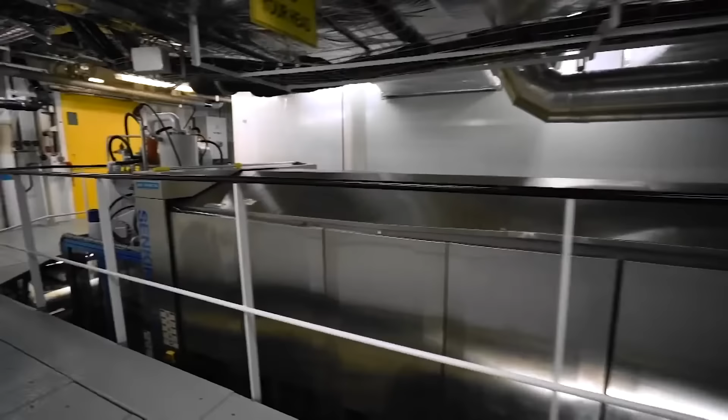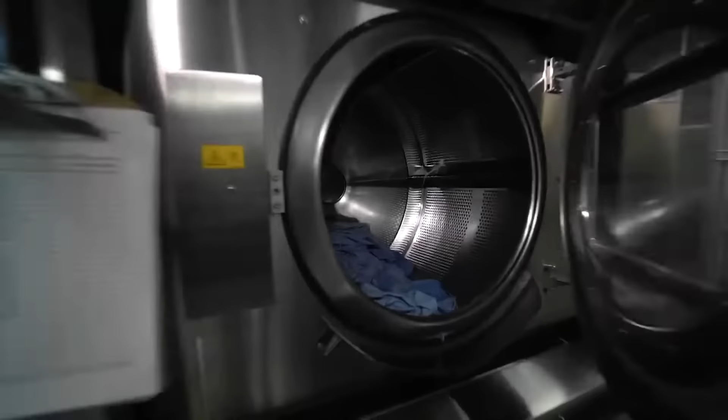Another one of the liner's important machines is the washing machine. It was built to special order and installed in the bowels of the ship at the time of its construction at the shipyard. A whole 2 technical decks of Symphony of the Seas have been given over to laundry. Here, about 10,000 towels are washed every day. They also tried to automate this process as much as possible. Housekeepers collect dirty towels from the rooms, sort them by color, and send them to the laundry decks. Here, they are loaded into this receiving bin.

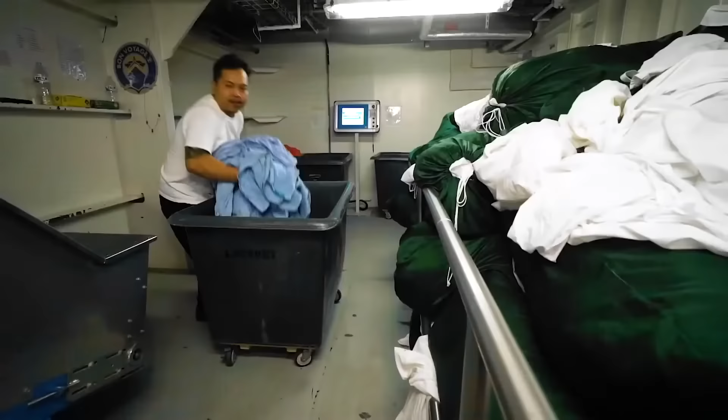Homeowners know that the most difficult thing to iron are sheets and duvet covers. It's really quite time-consuming to do with an iron, but here you have to iron 2,000 sheets every day. And that's why they installed this machine here. It not only irons the sheets, but also, this is the most amazing thing, I'll show you now. It folds them. Look, in an ideal way. Not just anyone can do that. In short, I want one of these for my house. Only thing is, I'm afraid it won't fit into my laundry room.

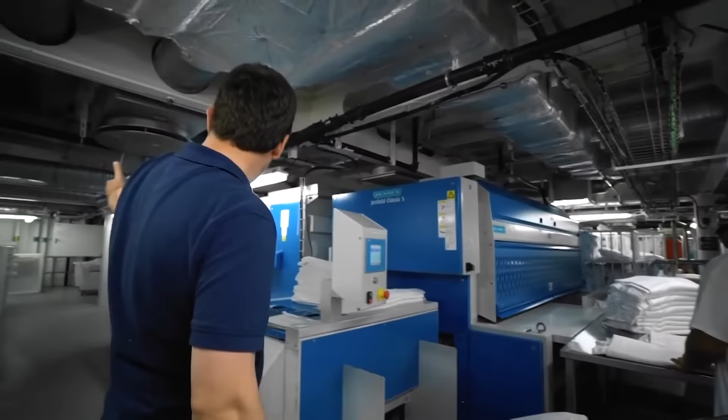The laundry employs several hundred people. There's more than 1,000 in the kitchen, dozens more are in the engine room and on the bridge. A huge army of the crew invisibly makes every second of the stay of the passengers on this ship unforgettable, comfortable, and safe. And yet the passengers themselves will never see most of them. Only service personnel who are in direct contact with tourists are allowed to climb up onto the passenger decks. That includes waiters, maids, bartenders, salespeople, hairdressers, and other staff.

Others, sometimes for several weeks at a time, don't leave the depths of this monster and go out into the sunlight at all. But keep in mind, first of all, they're well paid for it, and second, at the end of the day, they work on the largest cruise ship in the world. And although they can't take in the incredibly beautiful sunsets of the Caribbean Sea from their own balcony, behind the walls of their cabins, which are located on the lower decks, you can hear the rush of water. Yes, I promised that it would be a story without romance, but still.